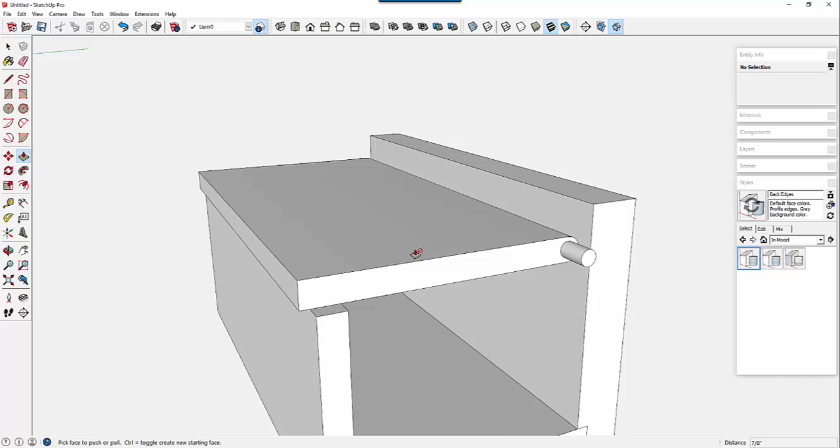In this last video, I'll show the completion of the sockets and grooves and dadoes for the till pieces, and I'll make the chest top with its thumbnail molding.

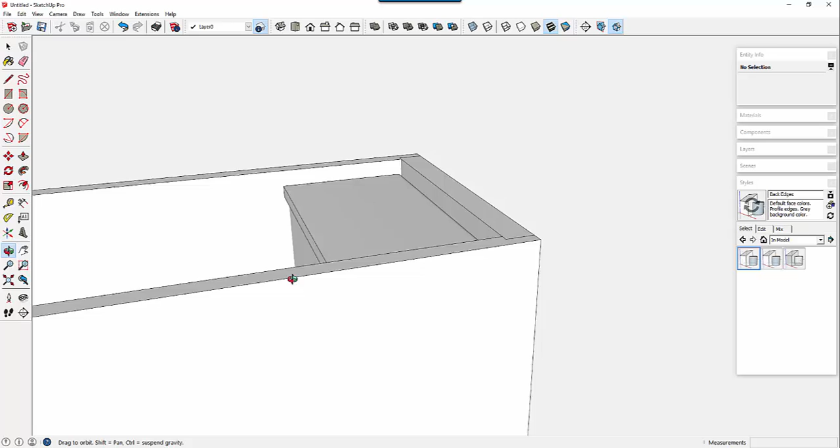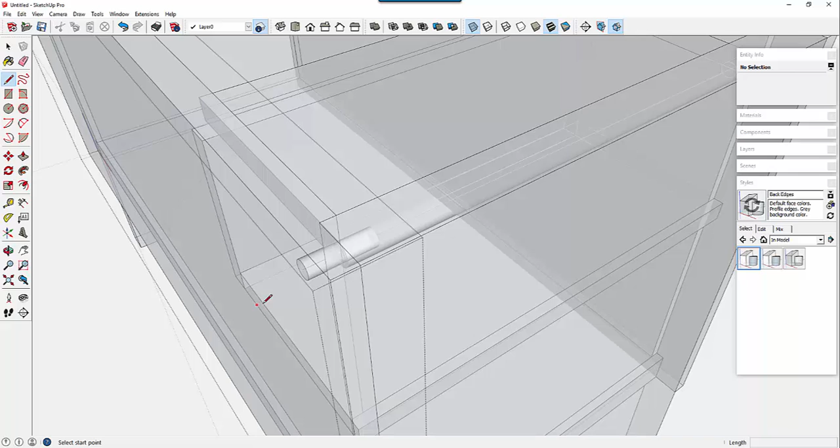This is the stage that we left it in the last video. The first thing I want to do is open up the front component for editing and get that center line of the hinge dowel marked into the front component and the back component, to identify where to create the socket in each.

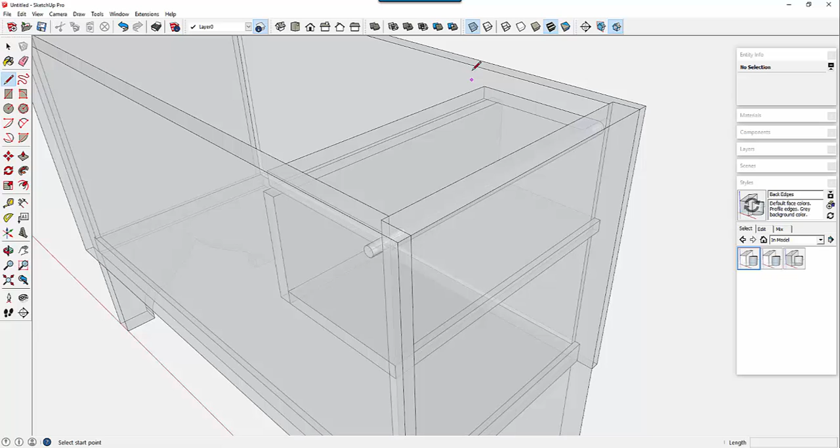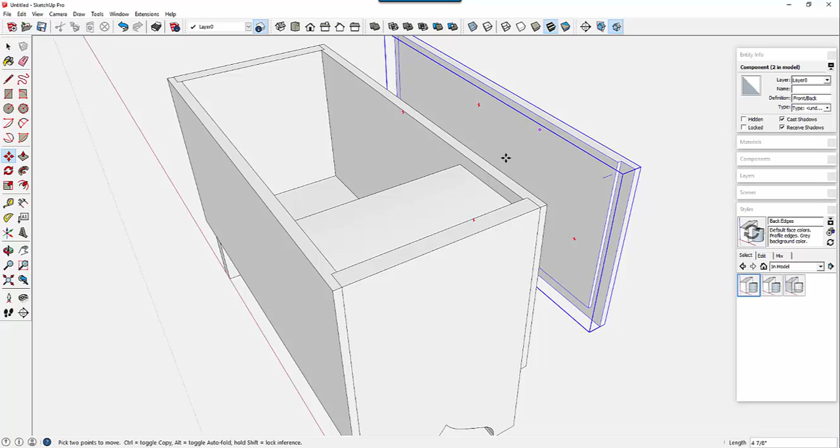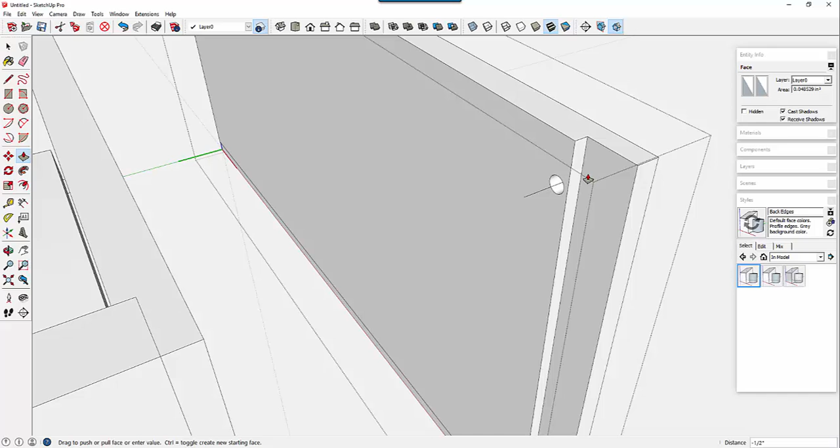So I drew a short line on the center line with the components open, and at this point I can make a copy of the back component and push it back. There you can see the center line that I drew, and I'll edit the component and create a 1/4 inch diameter socket 7/16 inch deep with the circle tool, and now the push-pull tool typing 7/16.

So both the front and the back, since they're the same component at this stage, have that 1/4 inch socket for the hinge.

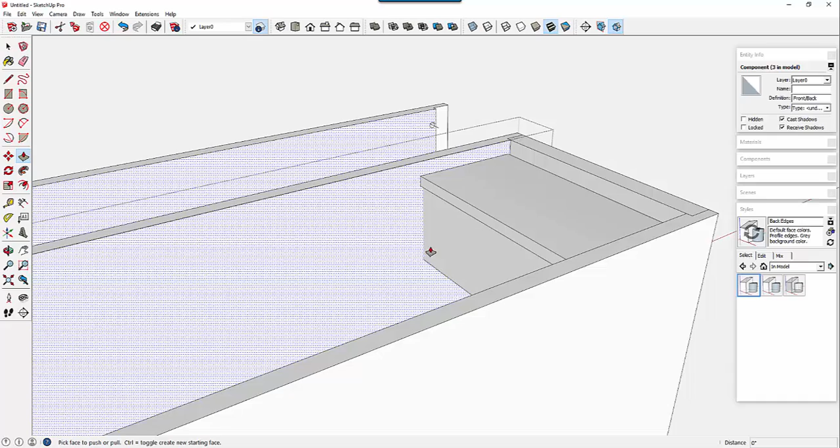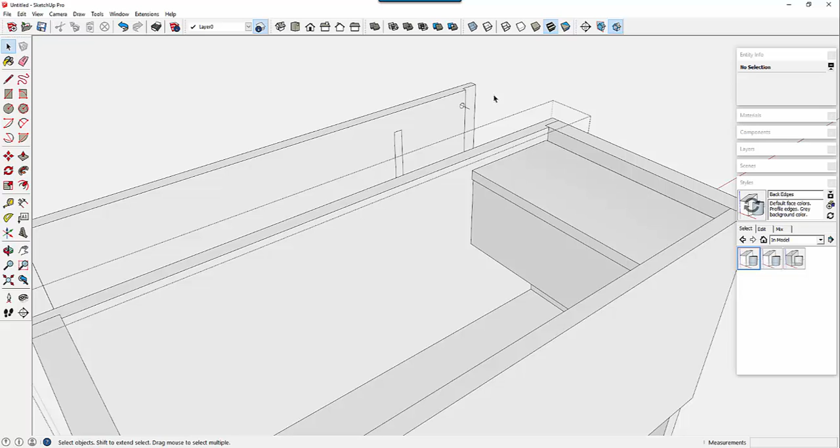The other thing that we need is the joinery, the grooves and dadoes for the till pieces. So I'm editing the back, and I'm intersecting the face with the model, and immediately the outline of the till grooves and dadoes show up in that back component. There they are. That's using the intersect function.

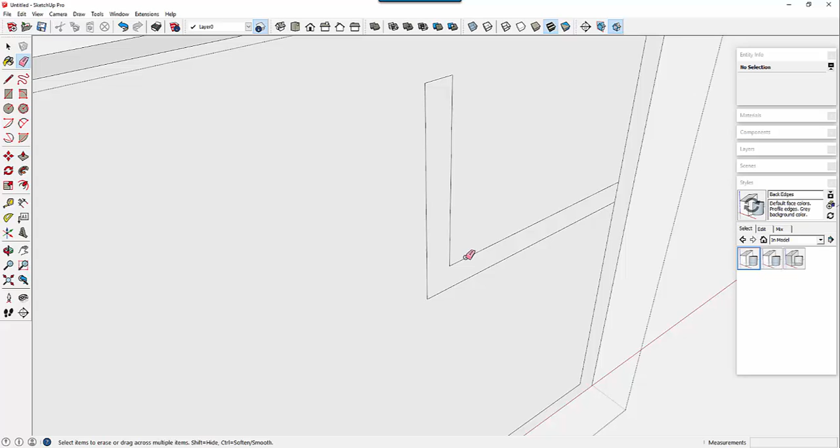Now I can turn these edges into the groove and a dado 3/16 inch deep, and accommodate the front and back components of the till.

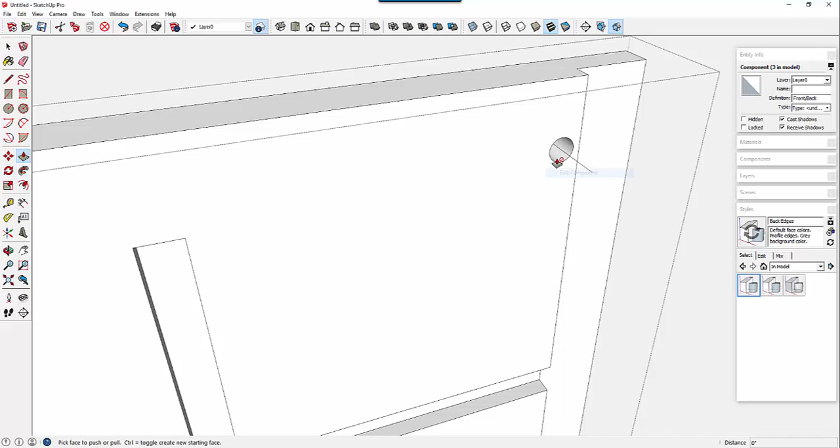Both the front and back components have that dado and groove. So the two components are still identical, but they're going to have to change and become independent components when you put locks, key locks, and hinges on them.

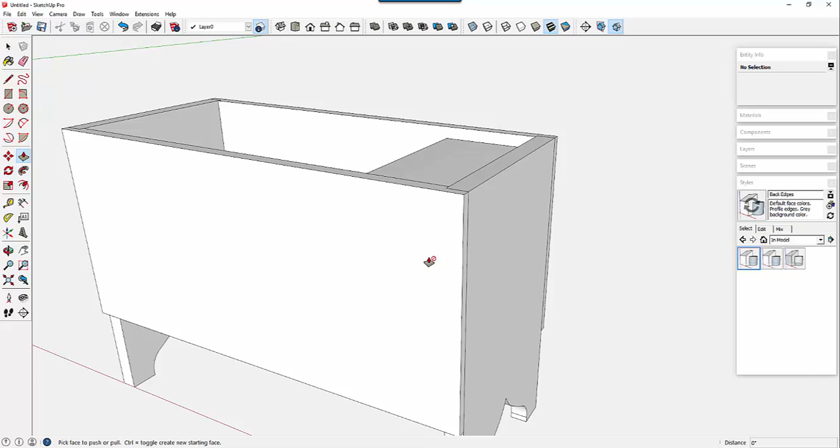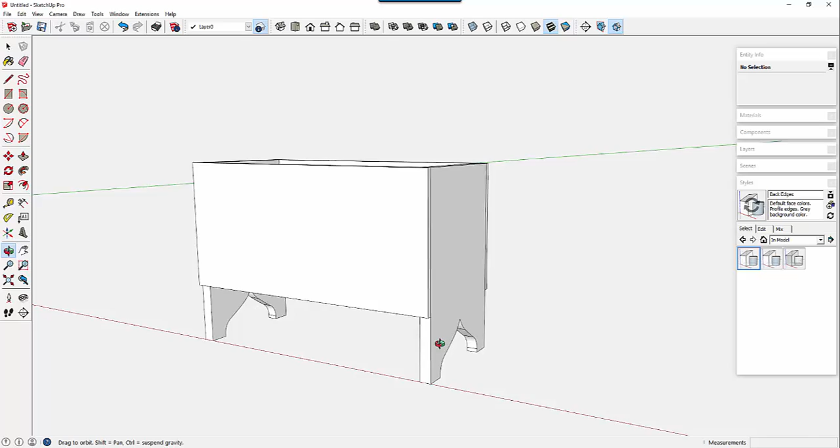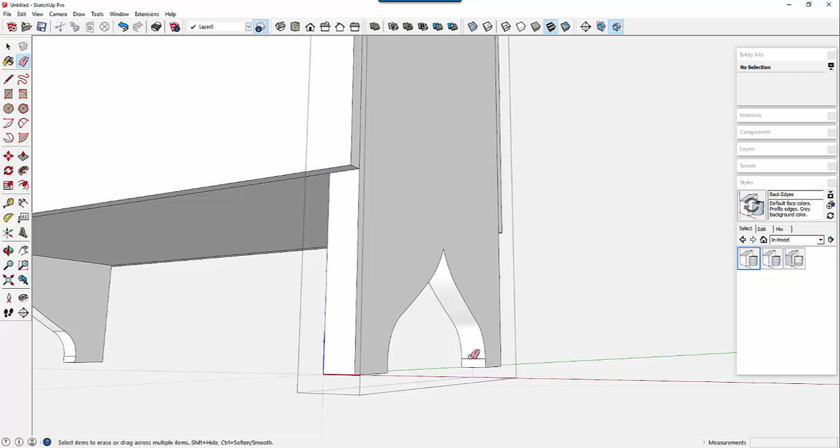Now I'm noticing some edges down here that need to be smoothed out on the end, and these edges right here should not show up. So I pick the eraser tool, hold down the control key, and swipe across or click on these edges, and that immediately smooths them.

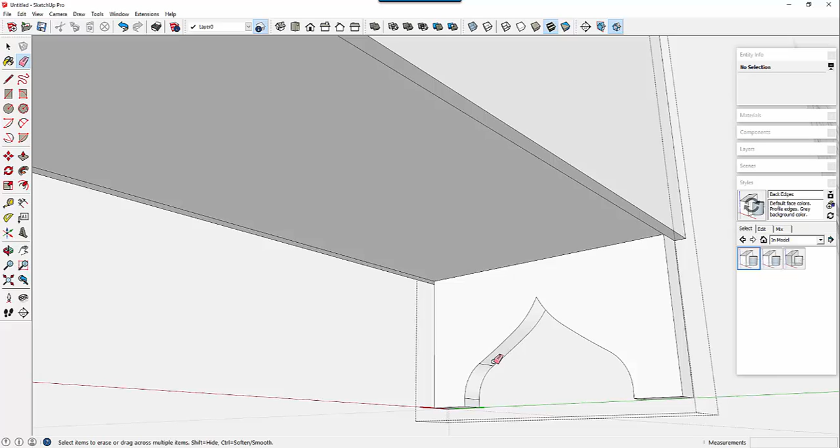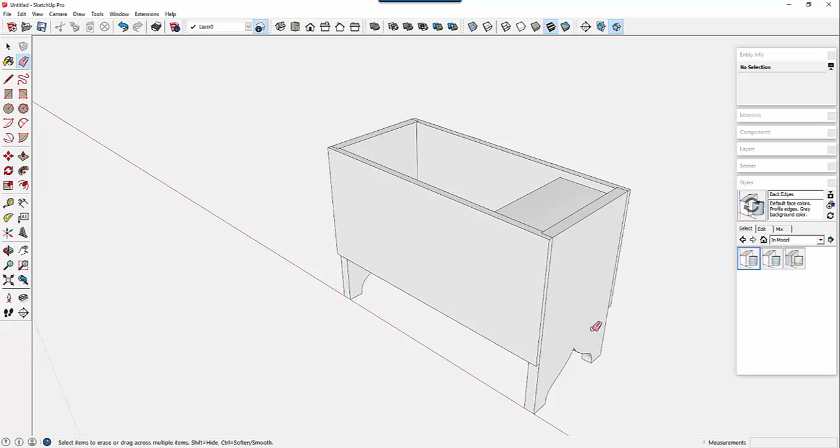That's the right end fixed. Now the left end, I have to open that component for editing and use the eraser tool with the control key to smooth out and remove those extra edges. Close the component, and I believe we're ready to make the chest top.

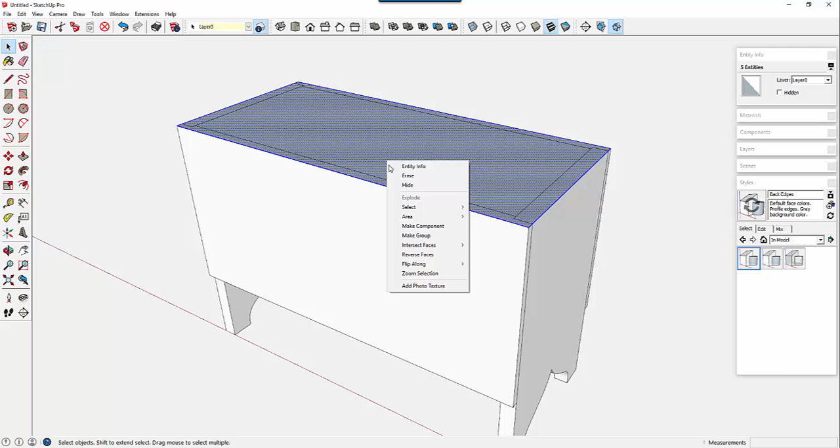Here we are with the rectangle tool again, corner to corner, creating a face. Double click on that face, right click, make component, and call that the top. Use the push-pull tool, edit the component, and pull that up 3/4 of an inch thick.

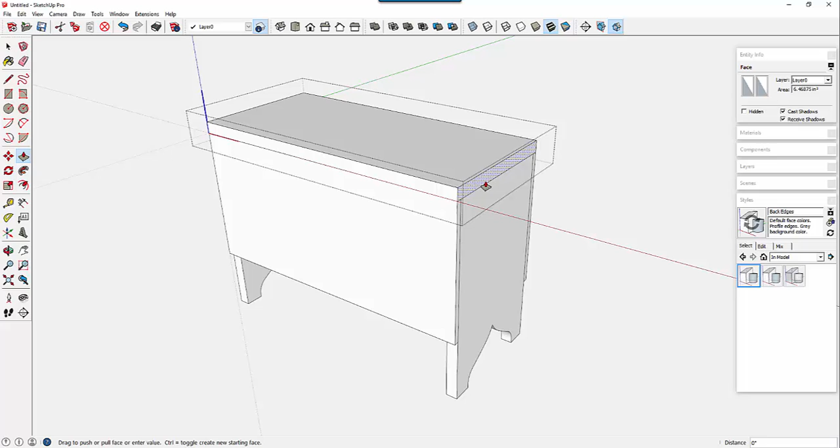There's an overhang on the top. The ends and the front are 1/2 inch overhang, so I'll pull out the end first, then I can double click on the front to create that overhang, double click on the other end, and I've got the full length and width of the top component.

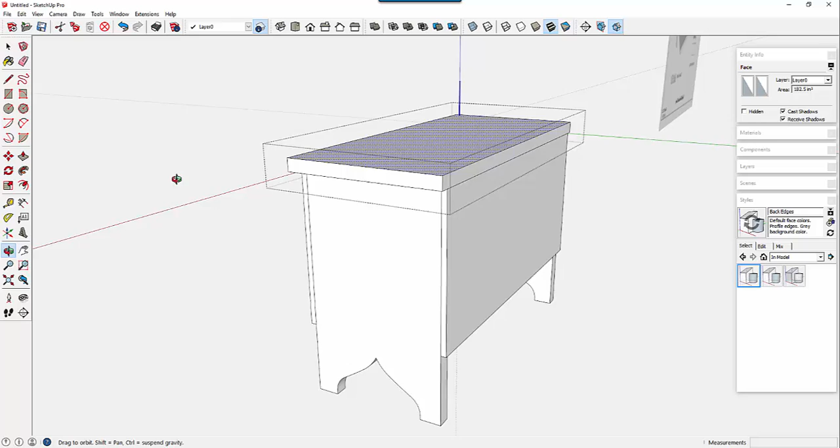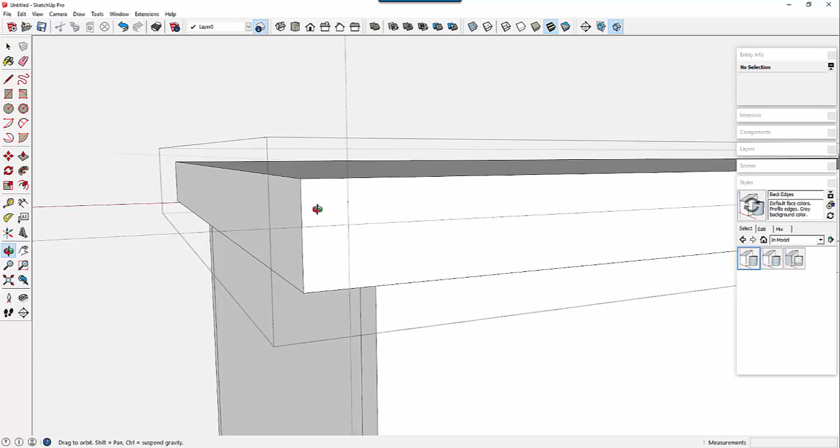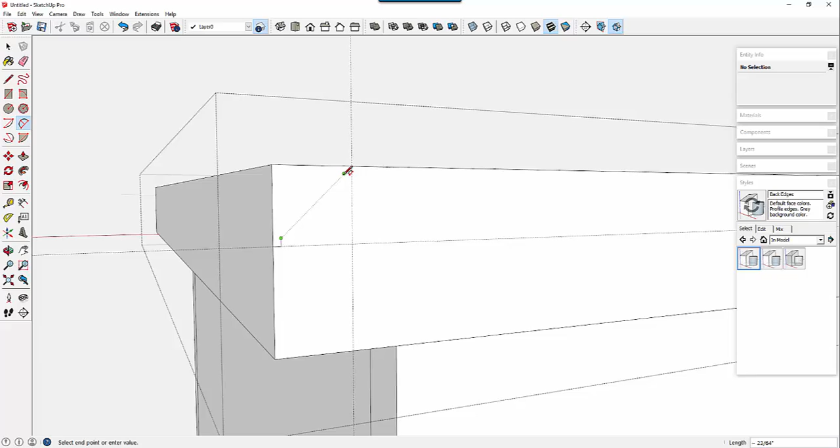With a line tool, I'm going to create a 1/32 inch length line down on the blue axis, and then over on the red axis another 1/32. Do the same thing, 1/32 across, 1/32 up, and then put in a radius with the arc tool between those points. Where's my tangents? It's close enough.

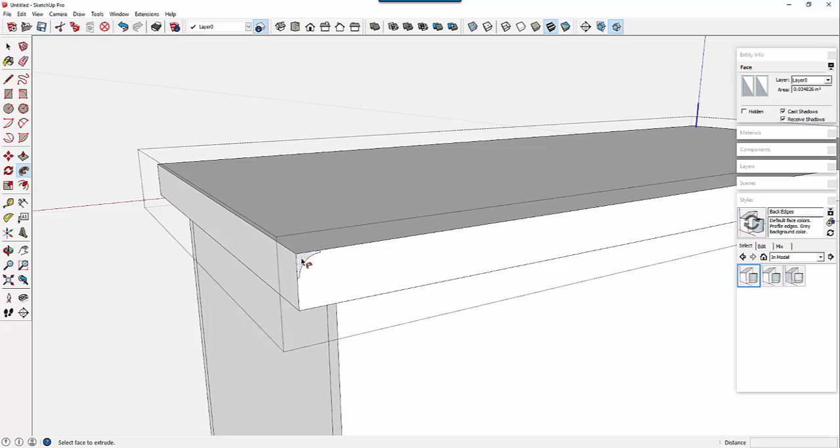There's the shape, the profile for the thumbnail molding, and I'll use the Follow Me tool to route that on the 3 edges by clicking and selecting the left end, front end edge, and the right end edge, and then click on the Follow Me tool. Click the Follow Me tool on the profile, and bang, all 3 edges are routed to that profile shape.

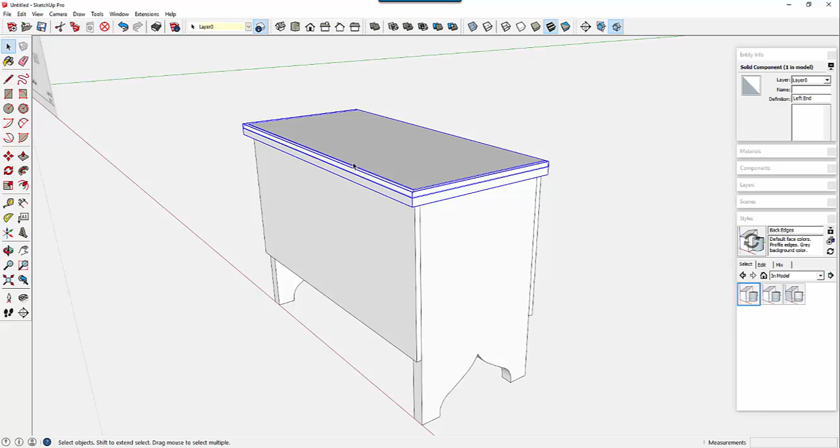One thing I would like to show is the hinge of the till top and how that can be rotated. I'm going to hide the top so we can see the till.

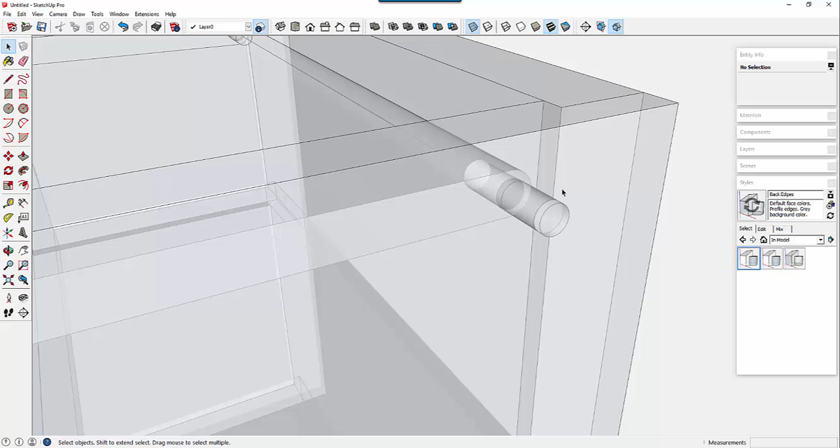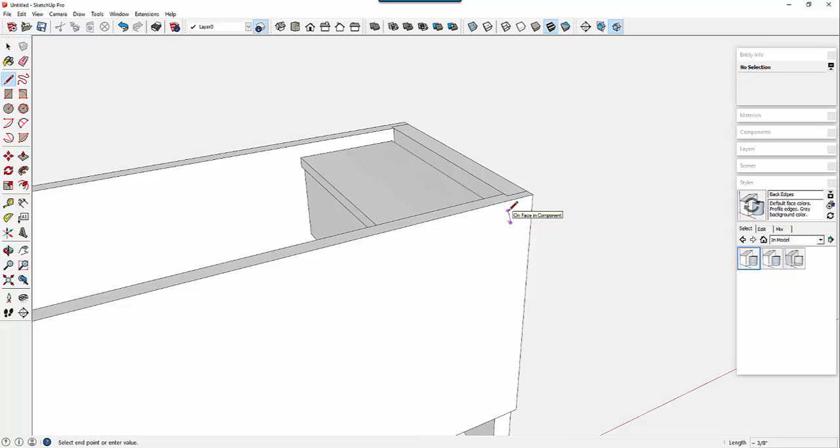I don't know where the center of the rotation should be, so I'm going to again edit the front component, and draw a line in the center line of the rotation of the joint of the dowel, and bring it out far enough so that it protrudes through the front surface. Now I can see where the center of rotation should be.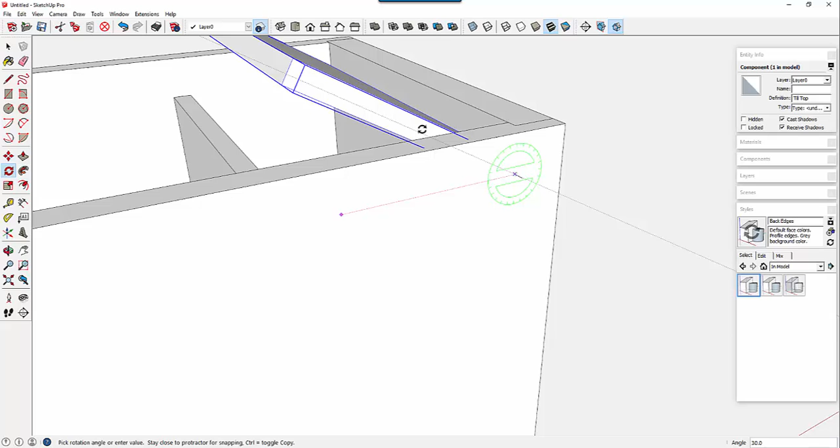I select the till top and grab the rotate tool, bring it over to the face of the front, click it on the origin there, and start the rotation. Everything seems to be working well with no interferences.

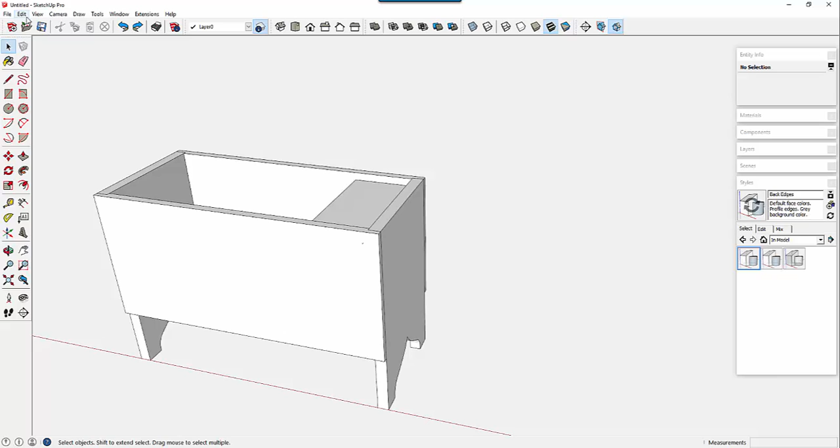Undo, and I'll bring the top back into place. There's more that can be done here with hardware. We haven't installed the hinges nor the lock. That's something that needs to be done, plus the location of the nails on all of these faces.